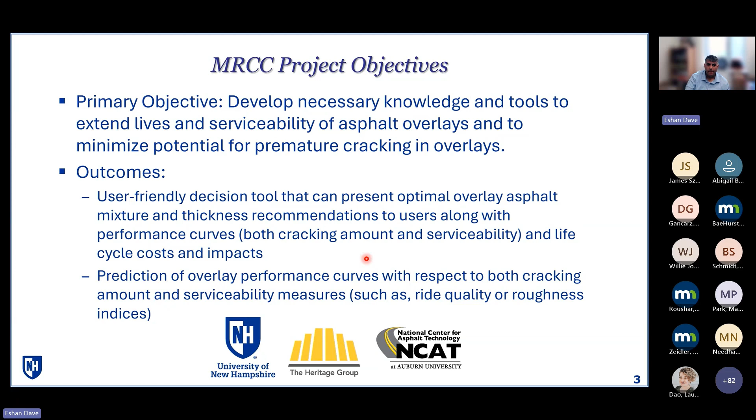So just to summarize the MRCC effort as a whole, this relies on 10 different test cells or test sections constructed at the MnROAD facility. All of these are on the main line on Interstate 94 westbound, and you can see where they're located.

That phase one I mentioned was really done on the original I-94 westbound alignment, which is getting ripped out right now or has already been, as part of replacing it. But that's where the old cells were from phase one.

This phase is on what is the main line right now, which means they see a quite substantial amount of real life interstate traffic on it, except when traffic is diverted to other lanes in order to do data collection or maintenance type activities.

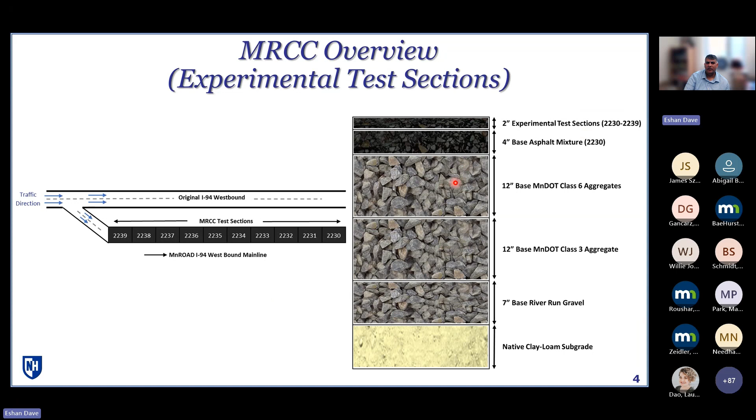This just gives you the overall cross section, so you can see it's a fairly built up flexible pavement system on the natural clay loam subgrade we have at the MnROAD facility. I'll go into more detail on this top portion because that's where the differences between different cells come into play.

The way the study is designed was really through the flexible team within NRRA as a group effort. Everyone pitched in and provided feedback into designing these sections.

It really started with initially building 5 inches of asphalt on top in 2 lifts with 2.5 inches each. A standard MnDOT 58S-28 mixture was used. All the mixtures in this study are 12.5 millimeter, or half inch. So that's the mixture that was used, placed in 2 different lifts.

Once that was done, each cell is about 500 feet long, so there's 400 feet of actual monitored or instrumented area, just to avoid the transition areas at either end. Within that 400 feet, it was further divided into 2 portions: a 200 feet portion, which is like your classical flexible pavement.

And then the second 200 feet portion - what was done was, after initial construction, transverse saw cuts were made within that section, represented by these red lines. So you can see the type of saw cut: there's initially a 25 feet spacing between these transverse saw cuts, and then a 50 feet spacing.

Now, in order to really create the most severe reflective cracking conditions, these saw cuts are full depth - all 5 inches of the asphalt pavement has been cut all the way to the bottom of that second lift as well. So they're really setting us up with these overlays to make sure they're getting tortured in a pretty severe way.

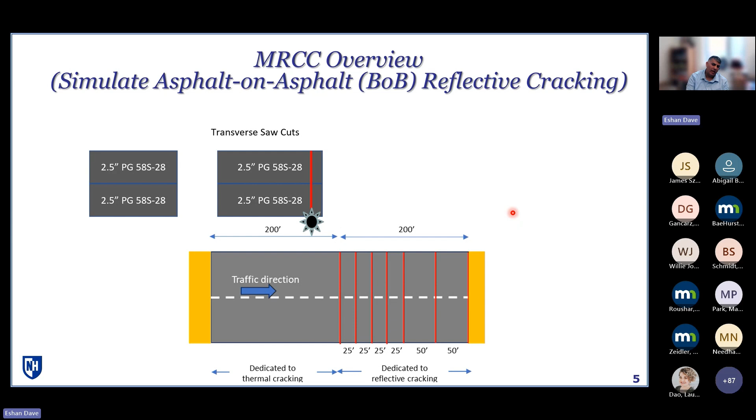That's important because, as with any research study, there's a limited timeline with this study, and we want to make sure we get to near the end of life of these overlays in a meaningful time frame and don't have to wait 10 or 12 or 15 years to get to it.

So once the saw cuts were done, the next step was to essentially go with a milling machine, and that removed a top inch of the top 2.5 inches, leaving behind 1.5 inches of that initial asphalt with the saw cut in it for half of the section.

Then a 2-inch unique surface was placed. It's called unique surface because that's the only variable between cells - the rest of the structure is identical. They all have the same layout as you see on the bottom, with the bottom 4 inches and everything below identical to each other.

So what are these unique surfaces? There are 10 cells, 10 different mixes.

So the first two are really controls, and there we are primarily comparing our standard unmodified asphalt binder versus modified binder, or if you speak the MnROAD lingo, that would be your B oil versus C oil. So it's essentially comparing cell 2230, which is this mix with unmodified binder, and cell 2239, which has modified binder.

Keep in mind that this 2230 mix is also the mix that forms the bottom 4 inches on all of these cells. So that's your standard base mix there.

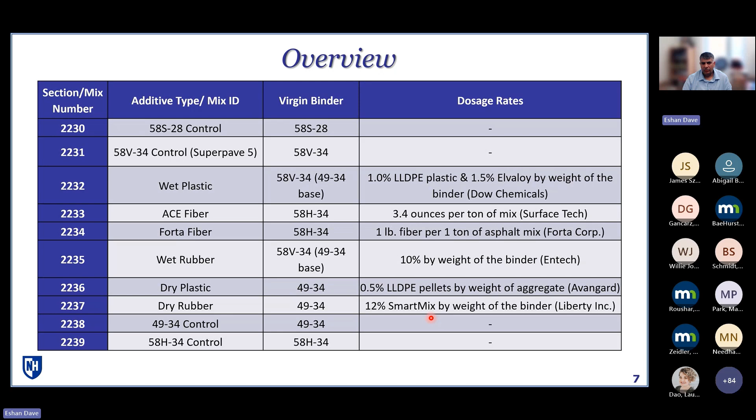So for today's presentation, as I said, we cannot go through everything, so I've tried to limit it to just the lab test results and the mechanistic modeling predictions we have to date. For lab testing, again, many acronyms here - we did many types of testing in order to really capture a breadth of different test procedures that are right now available and being used by many agencies, many NRRA agencies.

We wanted to have baseline information usable in models such as complex or dynamic modulus. Also, all testing was done with at least two different conditions: one is just a reheated condition, and one is a condition often referred to as critically aged condition, which for this location, based on cumulative degree days, would be 6 hours at 135 degrees Celsius of loose mix aging prior to compaction.

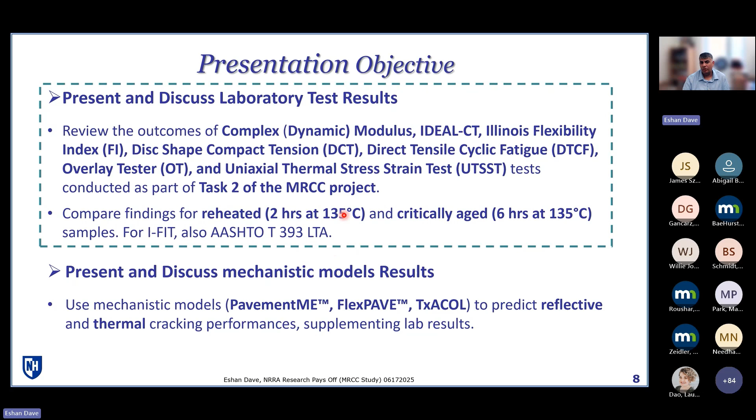On top of that, for the Illinois Flexibility Index test, Illinois DOT conducted that test. They also did what is their default as part of their BMD and mix design acceptance approach, where they compact or age their finally prepared flexibility index test specimens. So they also did that long-term aging in addition to these two conditions, and you'll see those results as well.

Quick summary of test procedures: for complex modulus, we followed the AASHTO T342 test protocol where testing was done at 3 different temperatures, and at each temperature we have 6 testing frequencies that allow you to generate the master curves of your complex modulus or norm of complex modulus, which is dynamic modulus, and the phase angle. That's important because we need that parameter to do different types of modeling where we can simulate the properties of asphalt mixture response at different frequencies and temperatures, with different traffic speeds and climatic conditions.

From a cracking perspective, there's one parameter that has often been explored: a rheological parameter. Often you hear this in context of binders called the Glover-Rowe parameter, but there's also an equivalent on the mix side called the Glover-Rowe mix parameter. We were able to calculate this using the complex modulus test results, and I'll show you those. In general, this parameter indicates how stiff your mix is, as in how much stress it will generate when loaded, and also how quickly it can shed its stresses through creeping or relaxation processes. Typically, we want a lower value for better cracking resistance.

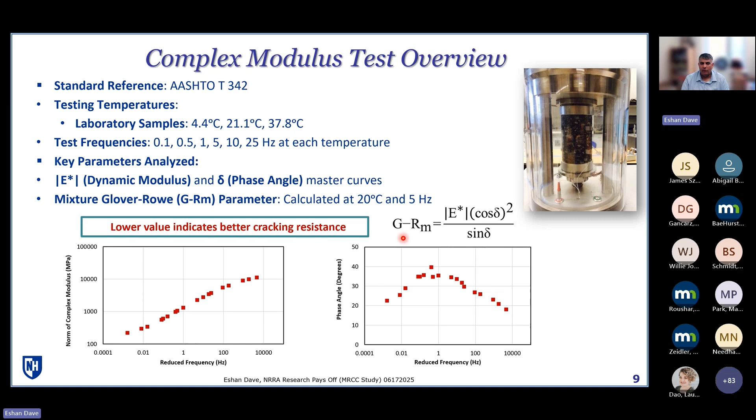CT index or Ideal CT is quite popular nowadays for balanced mix design applications. Most people in our community are familiar with this test, but essentially it measures the overall bulk response of your mixture when loaded, as to how it breaks apart or dissipates the total energy put into the specimen. You look at the total area under your load displacement curve, normalized using two parameters: one looking at how quickly your material falls apart, the other at how much strain or deformation it can undertake - the L and M parameters. Fracture energy takes into account the area, then you normalize against different specimen thicknesses. Typically for this index, you want a higher value, indicating better cracking resistance.

Illinois Flexibility Index Test, or IFIT, also has an AASHTO standard, similar in concept. The main advantage is it's truly a fracture mechanics driven test with a notch, unlike CT index where you're just looking at overall breaking susceptibility. Typically, once again, you want a higher value for better cracking resistance. It's once again looking at the area under your load displacement curve representing total work to break the specimen, but it also pays attention to how quickly the crack travels through the specimen - the crack velocity - determined by the slope on the post-peak side, giving you the composite flexibility index. As with CT index, all this testing was done at 25 degrees Celsius in this project.

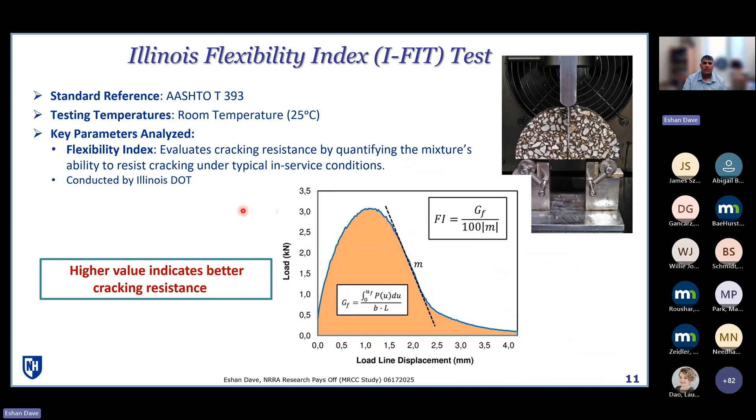The Cyclic fatigue test is a procedure developed and matured by the Federal Highway Administration with efforts from North Carolina State University. It's really designed to look at how traffic loading will degrade your mix integrity or mix capacity, focusing on that fatigue phenomena.

The testing is really done by using a cylindrical specimen, similar to a complex modulus specimen, that's glued on top and bottom and then imposed with cyclic loading. So you are applying a cyclic straining on that specimen and looking at how the capacity of the material degrades as you constantly apply a fixed amount of straining.

There is a damage-based index that has been proposed, and Federal Highways has conducted a validation of this index, called S apparent, or SAP, as people often refer to it. With this index, typically you want a higher number to have better fatigue performance.

But keep in mind this is a reflective cracking study. The first 200 feet of these cells are designed to be a traditional flexible pavement, with no sockets or joints underneath. That's where a parameter like this really makes sense, because you're looking at classical fatiguing of that structure under traffic loading and seeing how these mixes may perform differently.

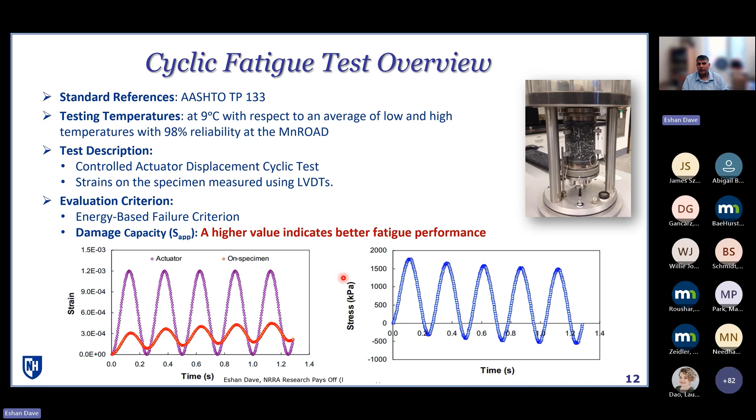Overlay tester. The Texas overlay tester, developed and used by Texas DOT through efforts of Texas A&M Transportation Institute, is also a test done at room temperature conditions.

The idea here is a somewhat simulative test procedure where you have your test specimen glued to metal plates with a joint in them, and those plates open and close in order to form the crack as it travels through the specimen. It's really a simulative test to look at reflective cracking, and there are typically two phases within this test.

You initially see a phase where there's a quick drop in how much force is needed, and that's your crack initiation phase, and then there's a growth phase where that crack continues to grow with time.

So there are parameters like CFE and CPR. CFE is indicative of the potential for your specimen, or what kind of energy it would take in order to get that initial cracking to happen. CPR is simply looking at, with each repeated cycle, how much more that crack would grow. So there are index parameters that we can extract from this test.

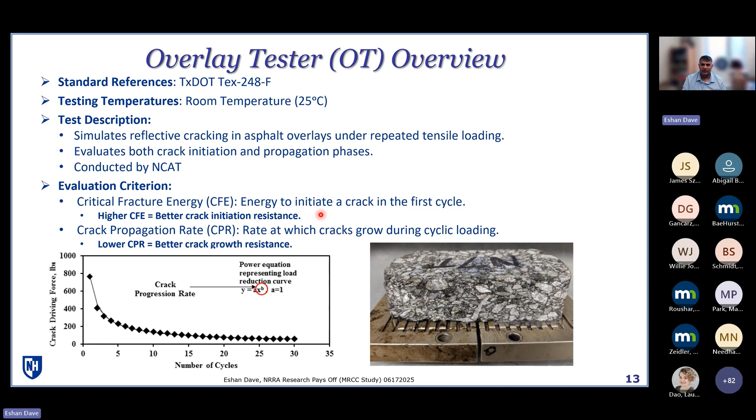Now, keep in mind that with MnDOT or MnROAD, we are at a cold climate location. All these tests I've talked about until this point, especially the cracking tests, are all done at intermediate temperatures. That's great when you're simply looking at general response of mixes, especially in warmer conditions.

But at low temperature, you obviously need to know what type of embrittlement these mixes would undergo as things cool down. That's one part.

The second part we also need to know is what happens to these mixes under the thermal action of cooling. Because if you recall, all of these pavements, whether they have a joint underneath or not, as winter comes and temperatures drop, they will try to strain because of thermal shrinkage, and that will do two things.

One, it will generate tremendous amounts of thermal stress, or tensile stress, in the asphalt mixture, but it will also make these mixtures a lot less ductile, or less tolerant to strains. As a result, we need to make sure that these mixes can survive those low temperatures and not undergo cracking.

I'll mention that phase one of the NRRA effort on reflective cracking clearly showed that thermally induced reflective cracking, when you have very low temperatures resulting in low fracture energies in asphalt overlays, together with that underlying joint opening because of thermal shrinkage,

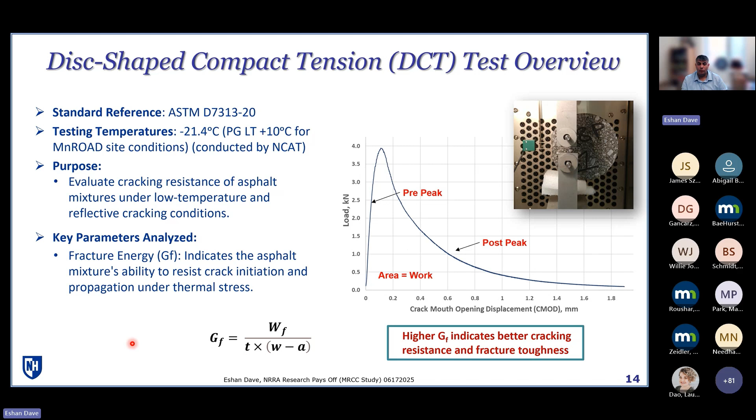And then last but not least is the uniaxial thermal stress strain test. The idea here is not necessarily to have a fracture test or cracking test, but to better understand what generates stresses in asphalt mixtures when you cool them down. To that effect, a test procedure was developed at University of Nevada, Reno, called UTSST.

Many of you may know of TSRST, a somewhat similar test where you have a prismatic sample of asphalt and you are just restraining it. Here, the advantage is that you really have companion samples - a restrained sample and an unrestrained sample. So not only are you getting your stress history of what happens to asphalt mixtures as you cool it down and don't let them freely shrink, but you also get your strain history to look at what happens to your asphalt mixtures - if it was unrestrained, how much would it shrink with temperature?

Combining that stress and strain history, you are really able to look at what's happening in the evolution of that mixture in terms of how it generates the stresses, at what point it starts to fail - not like a fracture test with a notch, but fail internally, as the stresses get so high that material starts to get damaged throughout and break, and eventually this restrained specimen fractures into two pieces. Using that information, we are also able to extract parameters that tell us how these different mixtures may behave regarding thermal shrinkage or low temperatures.

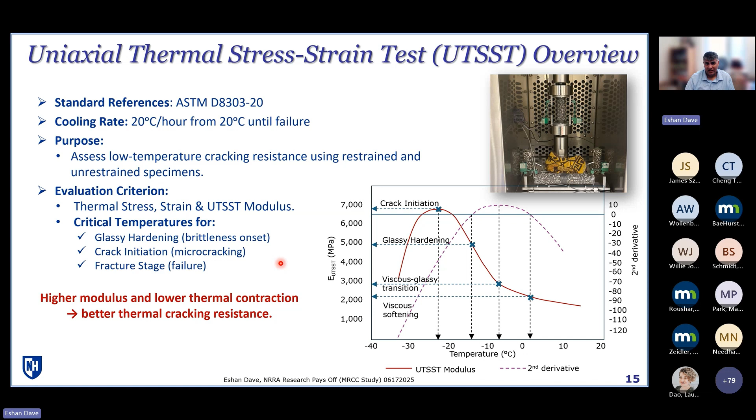So there's another test that we set up and conducted on these mixtures. All right, so now with all of these test results, let's start to look at the different tests and the results themselves.

Now here, what we are seeing is simply a black space plot, which is really a plot of your dynamic modulus and phase angle, just at one temperature and one frequency. I just wanted to show you the effect of aging. So, 10 mixtures here - don't worry too much about which symbol represents which mix type, we'll come to that later on.

The main point I want to make here is that aging is important, because each of these black or solid dots has a companion hollow dot. This is for one of the mixtures, this is for another set of mixtures. And what we are seeing is as we age these mixtures, two things happen: they stiffen up. So as we go from hollow to solid, representing short-term or unaged condition, just a reheated condition, to aged condition, they get stiffer, which makes sense.

But also equally important, they become less relaxant, right? Asphalt mixtures are viscoelastic, which means that when I strain them, after time, the amount of resistance or stress generated in them is really degrading or decaying. This horizontal axis represents how quickly these materials are able to shed those stresses. And we can see that their capability to shed the stresses is retarding or reducing as we age them.

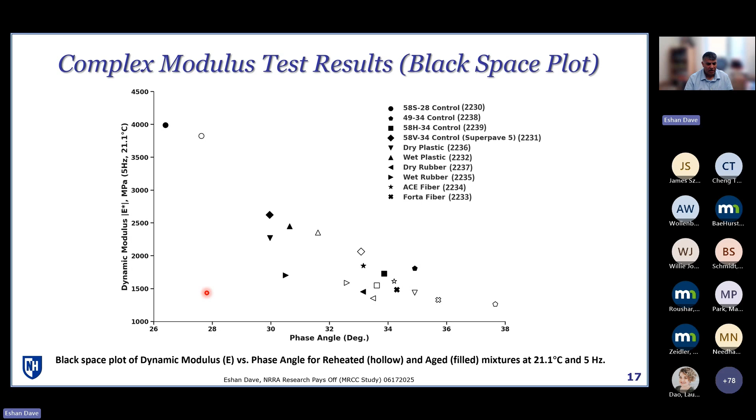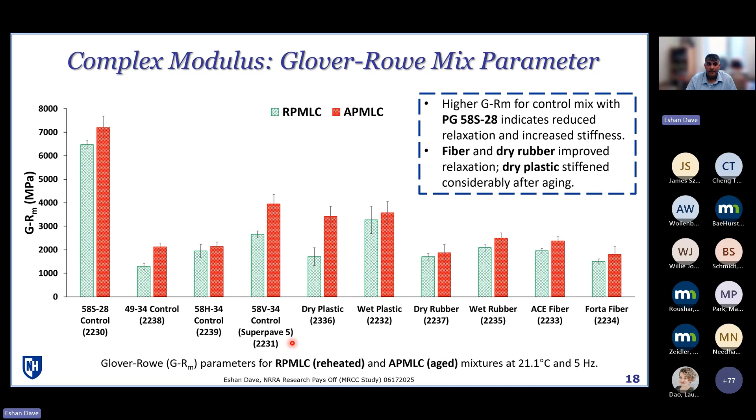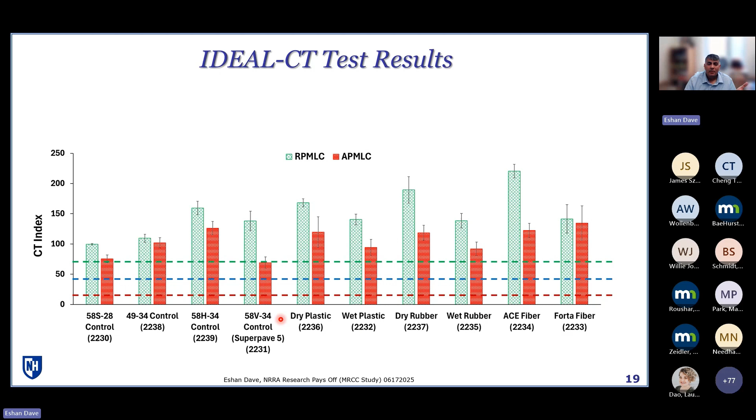What we can generally see is that the control material without any type of modification had the lowest CT index values, both unaged and aged. With aging, it also had a low value. The only other mix that had a very low value, even lower than control, was Superpave 5, even though it used that 58V minus 34 binder. It did not have that high of a value.

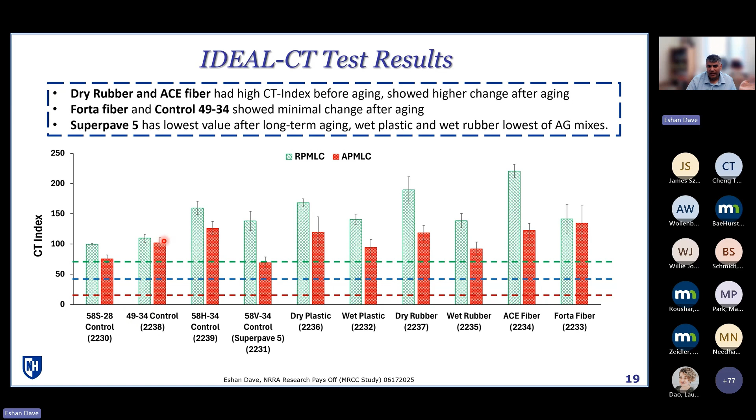You can also see that some of these other mixtures did degrade quite a bit. The ACE fiber, the dry rubber, and also wet rubber all had very high age susceptibility as determined by this mixture, versus some of the other materials like the 49-34 control, which had barely any change after going through that aging cycle.

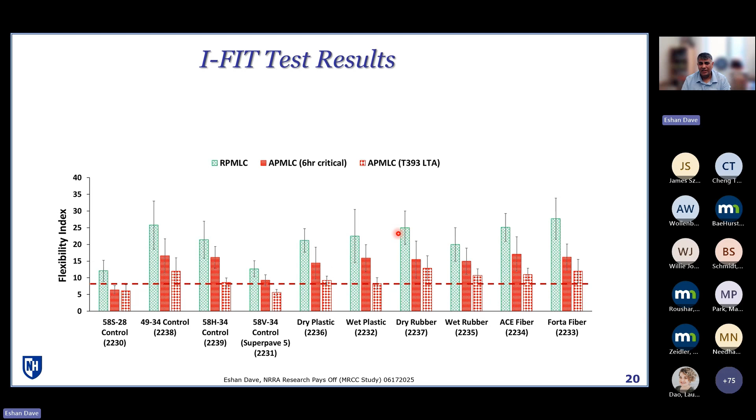Once again, the two mixes with the lowest properties are the control mixture and Superpave 5. All the other ones, I think statistically, are very comparable in unaged condition, and in aged condition there wasn't too much of a difference either.

One thing we did see was that the amount of drop from unaged to aged was a little bit lower on the 58H minus 34 and wet rubber. They did not have as much of a drop. The other ones continued on a similar trajectory as they went from the first to second aging condition, then second to third.

I also put a line here at 8, because that's often a threshold that Illinois DOT utilizes. Keep in mind that's typically done for unaged conditions, so all of these were already exceeding that threshold in the unaged or reheated condition. Some people have shown 5 to be the threshold after aging, and most of these still exceed that threshold of 5.

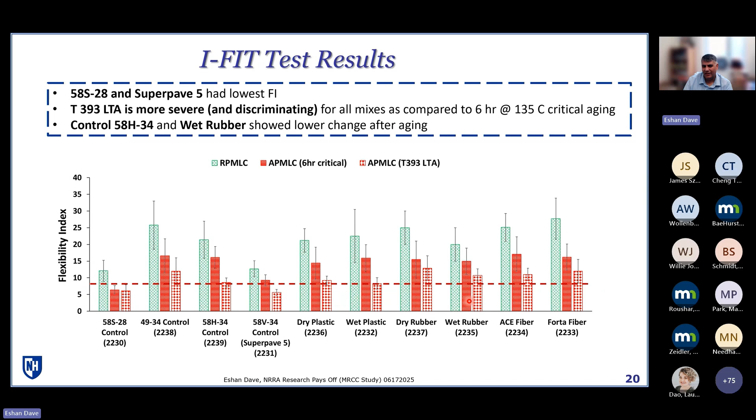Cyclic fatigue. We'll use one parameter here, the Sapp parameter, which Federal Highways is proposing and recommending. There's actually an info brief from Federal Highways that gives the limits. It uses the same kind of criteria as the MSCR binder grading, where you have standard, heavy, very heavy, and extreme traffic levels in terms of millions of ESALs this roadway might be experiencing. Since it's tied to fatigue cracking, it makes sense to have the limits tied to traffic levels.

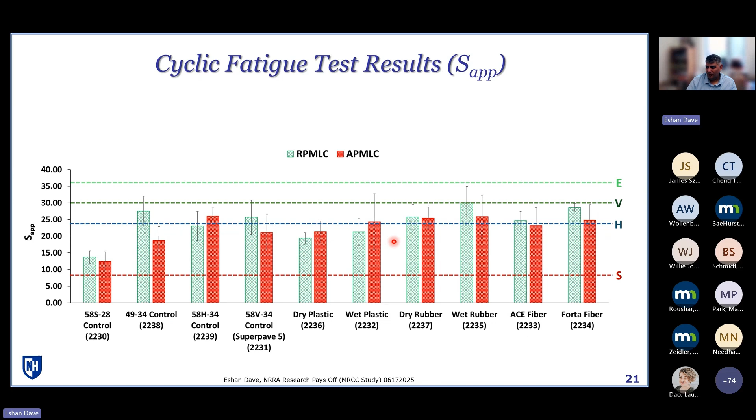As you can see, all of these meet and exceed the standard. Most of them get to the heavy level as well, which would really be the case with the traffic levels we are seeing in this particular case. So that's the threshold of 24, corresponding to 10 to 30 million ESAL type loading conditions. And most of them retain that even after aging.

Once again, the clear distinction is the control. Control was always substantially short-falling in value compared to almost all of these modified materials. The Superpave 5 and the 49-34 were the only two which, after aging, did have an appreciable drop in their properties as well.

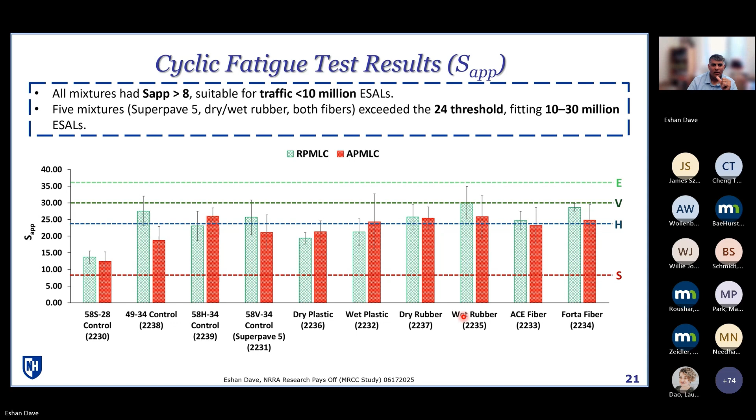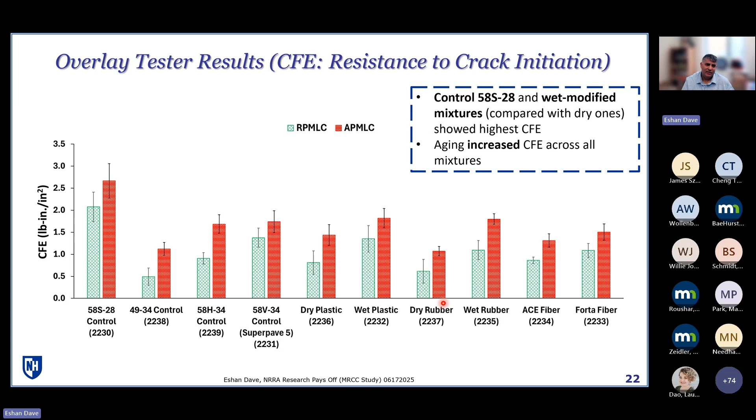That's why, with aging, all of these parameters increased compared to their unaged condition. More interesting to me is the second parameter from the overlay tester, which is your growth rate. There you want a lower value because you want slower crack growth, not fast crack growth. You can see that after aging, all of these mixtures have a faster crack growth, which makes sense, except some mixtures are more resilient.

Keep in mind that these last two with the fibers show quite a bit of resiliency to this. Not surprising in this test setup at room temperature, because those fibers really engage and provide bridging action against crack development. So they are carrying some of the load, preventing that crack from growing. That's why you are seeing this relatively flat value with low CPR values.

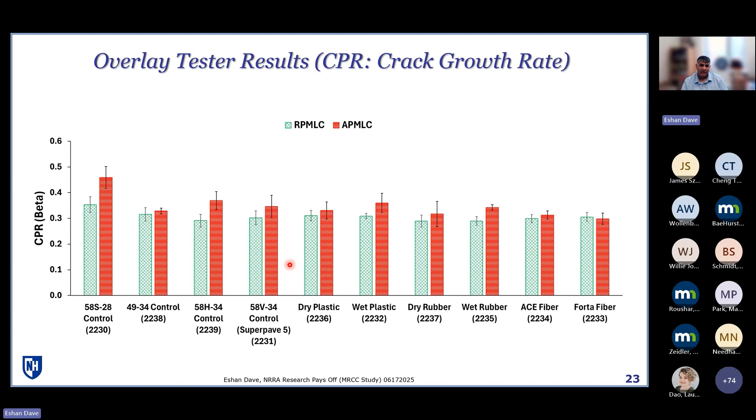With more of your traditional mixes, you start to see them creep up as you go through aging. Once again, the control was the one with the lowest performance, or the highest crack growth rate, as we saw with other tests.

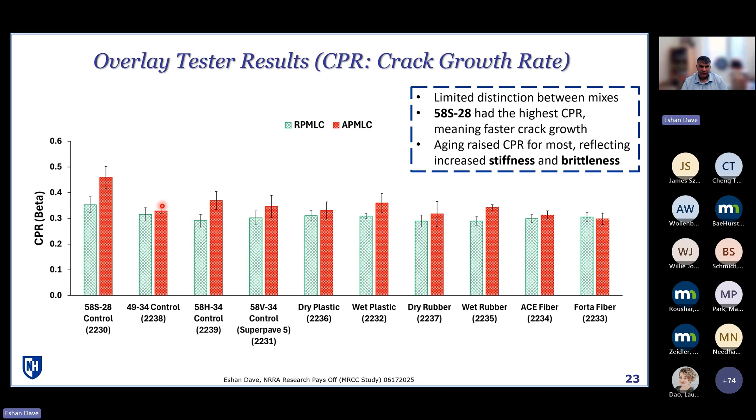The disk-shaped compact tension test fracture energy values. I put a line as a reference at 450 joules per meter squared, just as a reference, because that's the value that has been used in the past for designing mixtures in cold climate conditions with this particular test and parameter. As we can see, the control actually failed to meet that initial threshold. All the other ones well exceeded that.

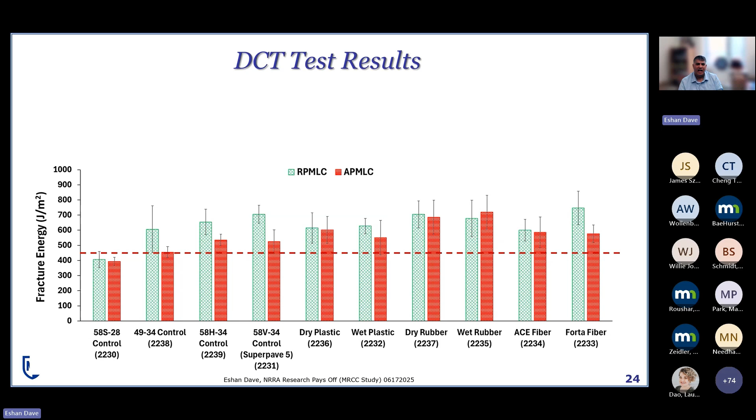As expected, after aging, most of them saw a drop in that as well, with the only different ones being those with rubber. So from a low temperature perspective, it seemed that these mixes with rubber were really retaining their ability to absorb energy even after having gone through aging, as opposed to other mixtures which were seeing almost a steady decline as they go through the aging condition.

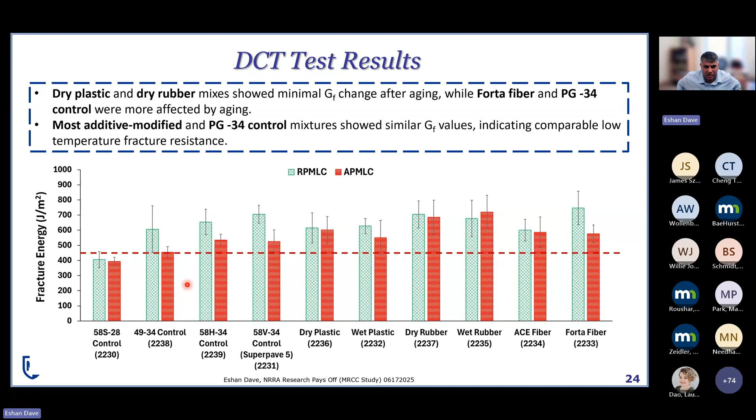So what we saw is that the dry plastic, dry rubber showed relatively less drop after aging. The wet rubber obviously showed very good properties and even a slight increase after aging, versus some of the modified ones. Obviously, control was already below the threshold, but even the 58H minus 34 as well as Superpave 5 both showed an appreciable decline in their fracture energies after they had gone through aging.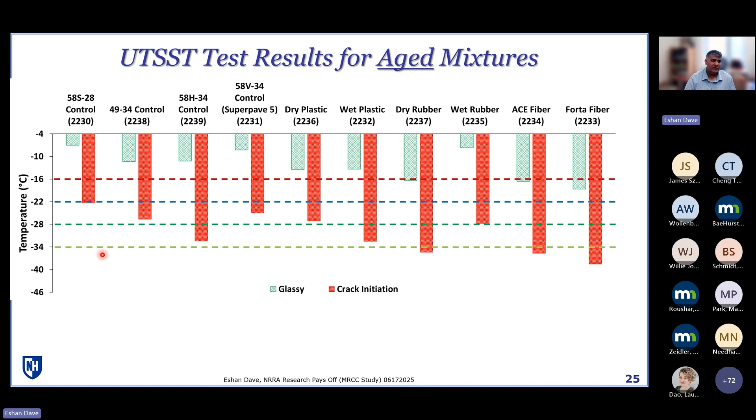As we can see here, in general the two fiber modified mixtures showed the lowest cracking temperatures, or temperatures they could survive before initiation of crack. Also, the dry rubber showed quite good properties. So did the polymer modified 58H minus 34. The standard did not show as low of a temperature for cracking.

Although it's graded as minus 28, we are not testing binder here, we are testing mix, and we are testing at a certain rate. It actually showed about minus 22 Celsius when it started to undergo crack initiation.

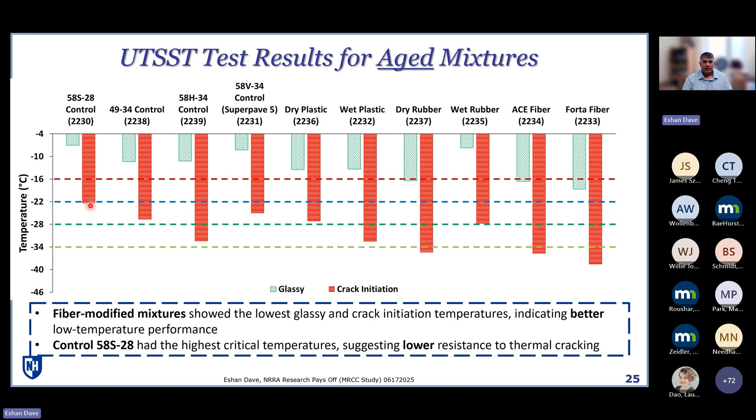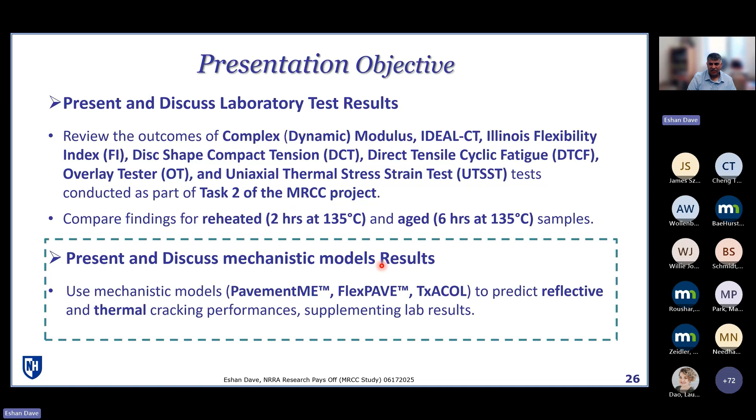So that's really the summary of all the different tests that we did. And I recognize that we are almost running out of time, because I want to leave some time for discussions as well in case people have questions. So what I'm going to do is, for the mechanistic modeling, I won't spend too much time. I'll just jump to the key results and then summarize my presentation. And if anyone has more questions, they are welcome to contact me, and I'd be happy to discuss the results with them.

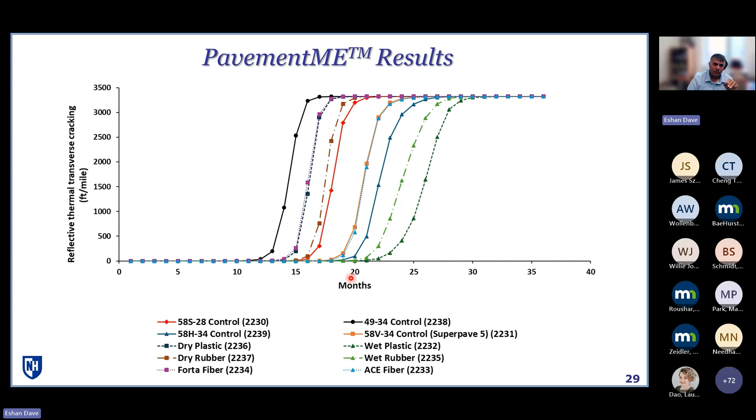So three types of simulations that we did. First one is just the Pavement ME, and I'm just going to show you the key results here. What we are looking at is, in conducting AASHTOWare Pavement ME analysis, what amount of reflective or thermal cracking may develop in these sections, in terms of feet of cracking per lane mile of your pavement length. And you can see after 1.5 years and 24 months, we had to play with traffic to really get it to crack in that kind of duration.

In general, what we are seeing is that the control is again actually not showing as poor properties as some of the modified mixtures are, but that's also an artifact of how Pavement ME works. It does not see or use any of your cracking results or indices - it's purely driven by your complex modulus. And so it's really a good demonstration, again, to show that...

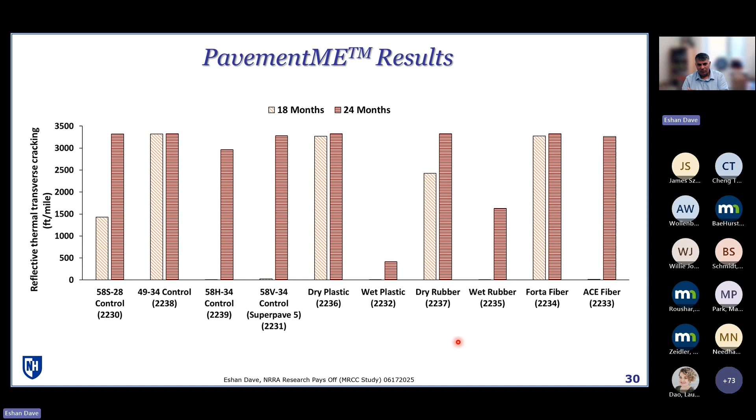When it comes to things like cracking, especially reflective cracking, tools like Pavement ME may not be as reliable, especially when you are doing some of these more innovative asphalt mixtures that are not like your traditional asphalt mixtures. When you look at traditional asphalt mixtures, as in these three, especially 58H minus 34, 58S minus 28, then it makes sense where a polymer modified mixture usually shows no cracking when you have some cracking in control. When control is almost fully cracked, there's still less than fully cracked in this case. But when you look at rubbers, plastics, or fibers, I don't think you can really trust the Pavement ME results.

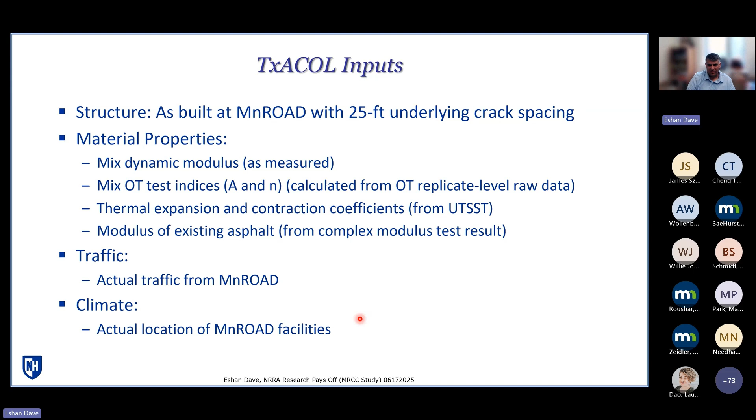And so that's where we also looked at another tool called TxACOL, which is developed by TTI. And this uses the overlay test as an input, and it actually simulates your fracture mechanics based crack growth. So if we look at the results from that tool, now we can start to see a little bit more alignment with what our lab test told us.

It's actually a trademark of USDOT and Federal Highway Administration. It's more looking at cyclic degradation, so it's not designed for reflective cracking. It's more for damage from repetitive traffic and thermal cycling.

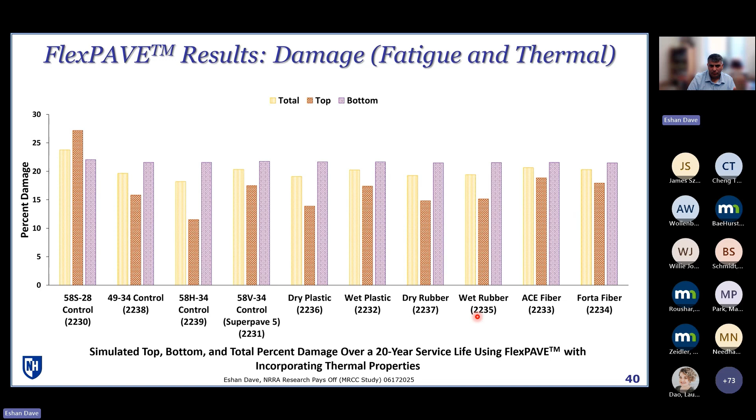I apologize that I went through the modeling part very quickly, but in the interest of time, I wanted to make sure there's a few minutes left at the end for me to respond to any questions or comments. So, key observations.

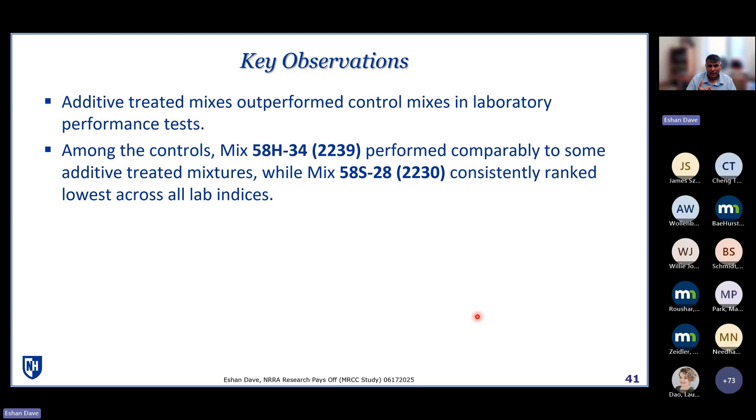Within the treated mixtures in general, the rubber and fiber modified ones exhibited better performance than those treated with plastic, but take that with a grain of salt, because it depends. We had two types of plastic products, and the dry plastic was the one that consistently underperformed compared to most of the other products.

And then lastly, between different mechanistic models, if we compare the results of these different indices, whether it's the fracture energy from DCT or flexibility index or whatever you may have, the most consistent matching was with the TxACOL simulation system, which had the best alignment between the performance test indices and the lab results.

Now keep in mind, all of this is synthetic in the sense that we are only comparing models to test result properties, not the field performance. So that's the next step.

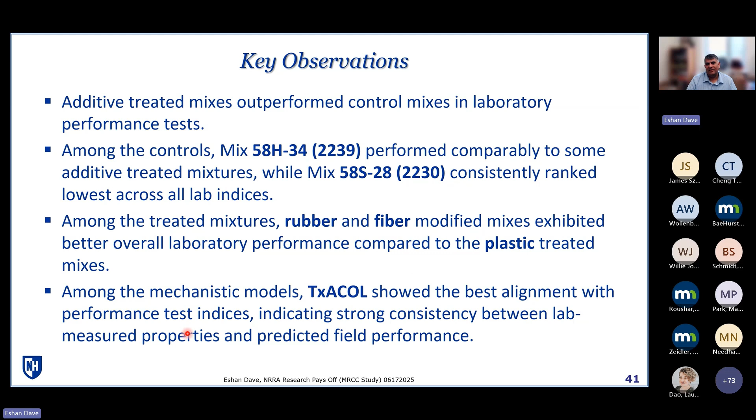The next step is essentially, now that the MnROAD cells have started to crack—this January was the first time we observed cracking, not surprising in the control section with 58S minus 28—now that data is coming in...

we are actually able to compare the field performances to these indices to tell you which lab test makes more sense or gives you a better comparison, but also which modeling efforts can be more reliable in order to predict performance when it comes to reflective cracking. So obviously that effort is underway right now.

Also, part of this project involves quite a bit of LCA, or life cycle assessment, work. Phases A1 through A3, what we call cradle to gate, is completed. I presented this already to many of you who were at the NRRA workshop in the beginning of May, I think. So you've already seen those results.

The A4 through A5 analysis is already done. We are in the report writing phase. And then once we start to have field performance data, we will also be able to get some of the B2, B4 type of life cycle phases and their impacts and cost as well.

So bottom line, there's still a lot to come in this study as we start to integrate lab results with field performance and performance modeling as well as LCA. But there's already so much that we have learned about how these mixes are expected to perform just using the lab test results I showed you today.

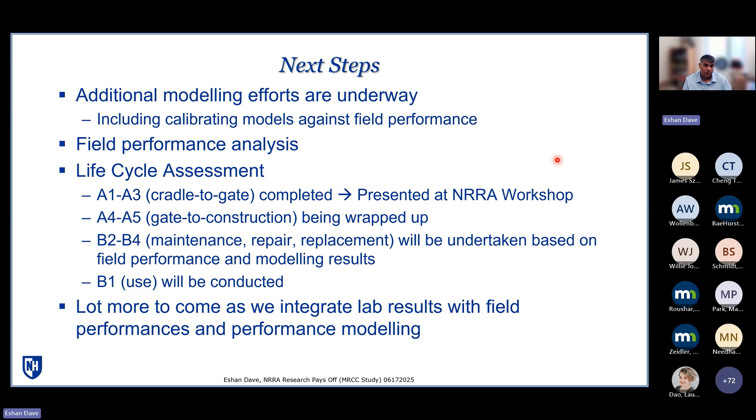So with that, I'll stop, and hopefully if people have any questions or comments, I'd be happy to try to answer those.

Well, thank you, Eshan. I do believe you answered the question that was in the chat about the recycling material. Yeah, so that is all I've seen so far. If anyone has any other questions, you can raise your hand, unmute, or type it in the chat.

I do see a question here. Did you need more asphalt to coat the dry additives?

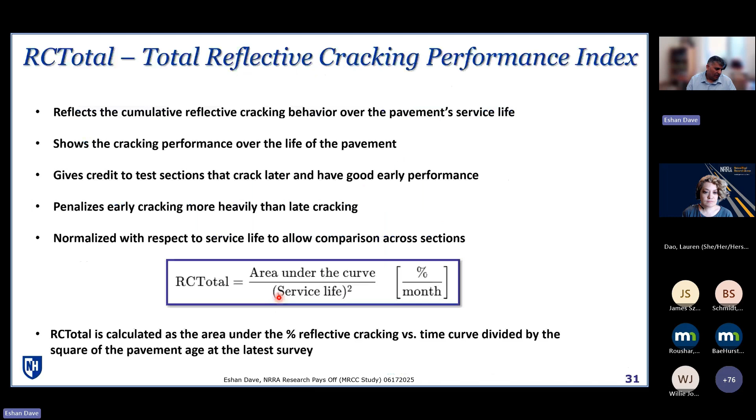Good question, Kurt. For the dry additives, we have the mix designs. If you go to the NRRA project page, the construction report is there with all the mix volumetrics as well. And the answer is no, the dry additives did not really end up needing any additional binder, at least for the dry plastic, to get them coated. Keep in mind this was a companion effort with the additive group experiment, and the mixes were optimized initially using balanced mix design testing with Hamburg and CT index, in order to get them to a certain minimum CT index and passing Hamburg numbers. So there were some modifications done on that basis. That's also why you see those dry additives have such a softer initial binder grade, in order to activate them. But as far as my memory serves, there was not really additional binder needed or added, at least not in any appreciable way, for those dry additives.

Any other questions or comments?

Relative cost of each of these grades. Good question. We actually did obtain and gather that data in order to use it within the LCCA, the life cycle cost analysis, which will utilize that. On this particular project, the additives were donated for free by the respective manufacturers, but we have not fully processed the information. We have the data, and that will be used within the decision tool when we're doing the life cycle cost calculations. In a quick way, between the SBS modified and the regular, there was your standard difference that you typically see in your state, based on your modified binder PMB versus your straight run binder. But for these other products, there's obviously cost attached to them, especially products like fibers - there's a standard cost in that, and that will be included. We're working on the task 4 report that has the LCA, including the cost, and that will be included in that.

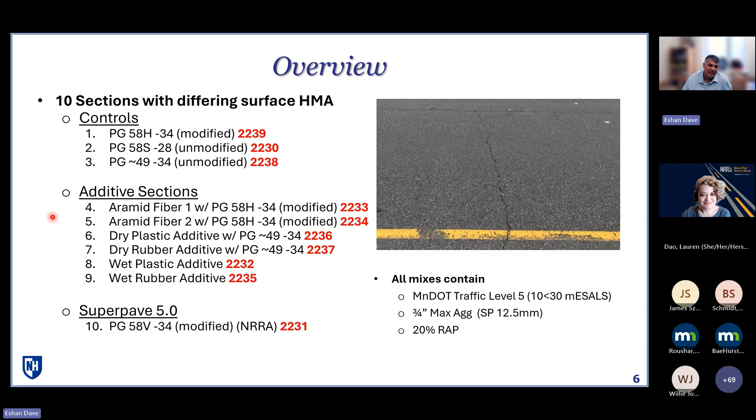The question is about the opinion of sawing HMA when overlaying a new or nearly perfect condition, and filling immediately after paving, in an effort to control secondary cracking and damage from incompressible particles and moisture. Personally, I don't recommend sawing HMA when overlaying a new or nearly perfect condition - I would not do that. Here it was done more out of necessity to create that really severe condition underneath. They did do some air blowing after cutting these, and really brooming, to make sure there was no debris stuck inside these saw cuts, in order to prevent incompressible particles from getting in there. But again, the idea was to create the most severe condition, where your underlying pavement has like a full depth cut or crack in it. Personally, my opinion would be to not do that. Any benefit you can get from any sealing action still left behind in the underlying overlay, together with any load transfer you can get, I would take it. That said, I would definitely be suspicious if there's a lot of water coming through those underlying cracks, or if the cracks have really tented and there's a lot of loose material. I would recommend milling it until you get to a more sound layer prior to overlaying. So that would be my recommendation to prevent that damage from incompressible particles or moisture.